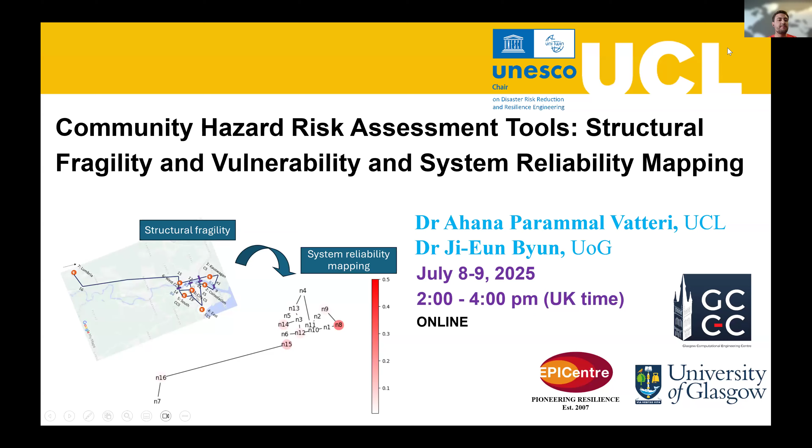So just to introduce our speakers today, Dr. Ahana Parammal Vatteri is also a postdoctoral research fellow at the UNESCO Chair. She works mainly on tools for disaster resilience of integrated systems, in particular with the integration of Bayesian networks and agent-based modeling, and her research has focused mainly on confined masonry and school infrastructure. Dr. Ahana is also working in the Mediate project, the Resilience of Infrastructure Systems on the Horizon Europe project, and she has worked in different consultancy projects across the world.

We also have here Dr. Ji-Eun Byun. She's a lecturer in smart, sustainable, and resilient infrastructure at the Division of Infrastructure and Environment and Glasgow Computational Engineering Center in the University of Glasgow. She works mainly on reliability systems and reliability-based optimization of structural and infrastructure systems against extreme events, in particular natural and human-made hazards, and she is particularly interested in analysis related to complex and large-scale systems, including transportation networks, utilities, resource systems, and structural systems.

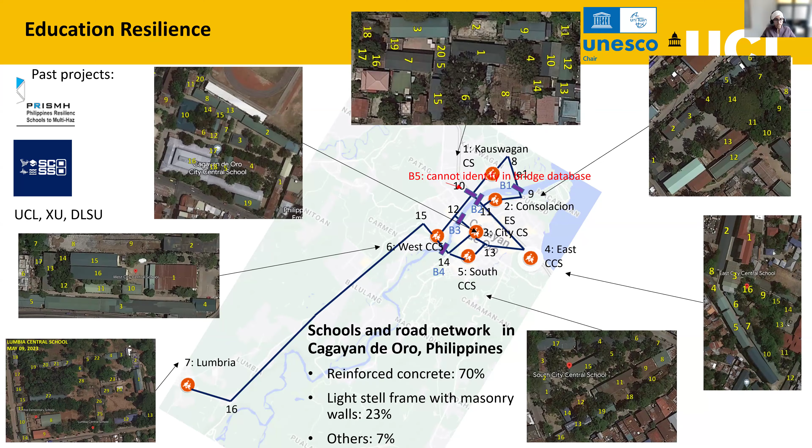So why we are looking specifically at education resilience is mainly because it's a fundamental right for every child to have access to quality education, as we also see in one of the Sustainable Development Goals. It's one of the main objectives of the UNESCO Chair to promote resources for education resilience, risk assessment, and recovery. We thank our colleagues in Xavier University, Philippines, who have been an integral part of all of this work in the Philippines, starting from the data collection on schools and road networks, and also with the recent workshop and event we did in Cagayan de Oro, with support from a PR seed grant.

Now, we come to the topic of today. What we understand as the risk from natural hazards is often comprised of a spatial and temporal overlap of three components: the hazards, exposure, and vulnerability.

For the hazard characterization, we use models that characterize the likelihood of experiencing different hazard intensities at different locations. For the exposure, we understand the location, the quantity, and the physical characteristics of our assets which are exposed to the hazards. And the third component is the likelihood of damage to these assets under different levels of hazard intensities.

So in today's presentation, we are going to look mostly at earthquake hazard, exposure, and vulnerability, even though the techniques in general could be extended to other hazard types. So how do we begin with such an assessment of risk from these three components?

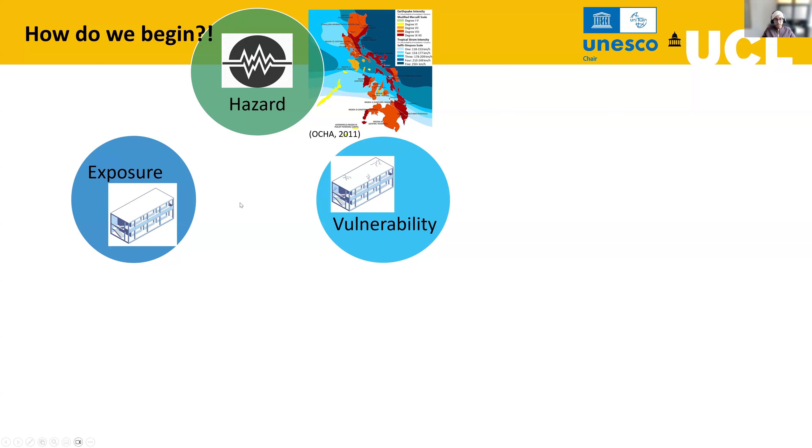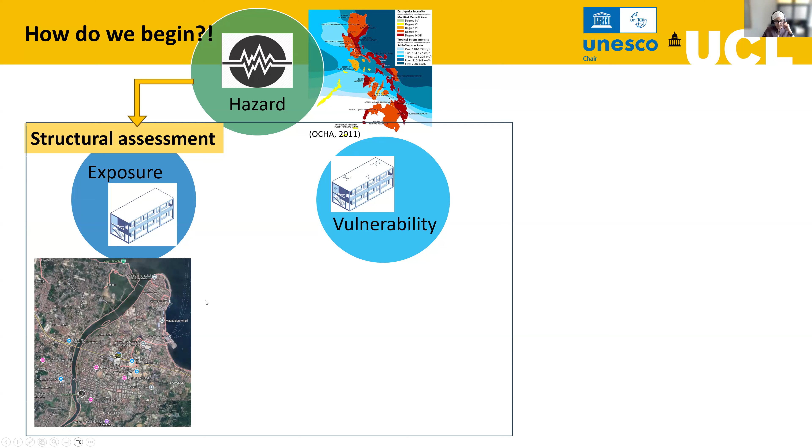Coming to the structural assessment of our exposed infrastructure, we are talking about schools here. Within the city, we will have assets distributed. We first identify a certain number of representative index buildings in order to reduce the load for analysis and also to make the problem quantifiable and handling, so we are able to handle the size.

For this, we will introduce certain tools, following which we can identify some representative buildings, which can then be taken up for detailed seismic analysis, where you would quantify the capacity of your buildings in terms of their base shear and displacement capacities.

From the analysis, we will then move on to quantifying the seismic performance in terms of seismic fragility, which is usually used to express the probability that a level of damage is either reached or exceeded for a given intensity measure. And from fragility, we can then move on to vulnerability, which quantifies the likelihood of losses under a range of hazard intensities.

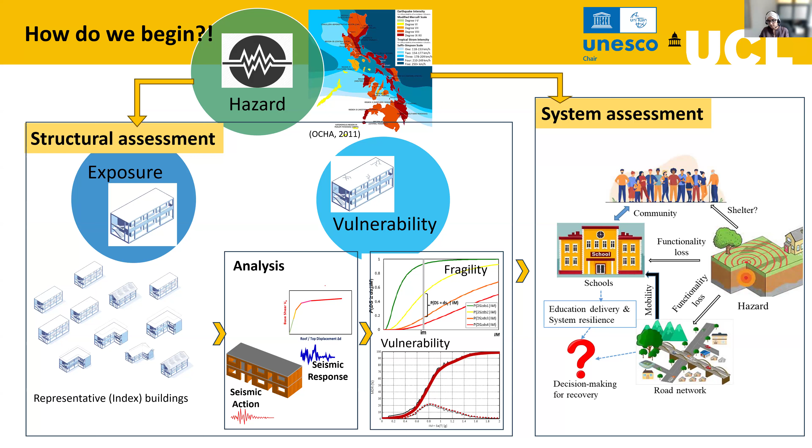These inputs are based on the structural assessment of school buildings in our portfolio, which can then contribute to the system assessment, where we also integrate the interdependency and interaction between different elements, such as the school buildings, the road networks, and the community that uses both these assets. So without further ado, we will focus on the structural assessment in this part of the presentation.

We will introduce first the GLOSI taxonomy, which is a tool for identifying representative index buildings from a large number of building portfolios for schools.

Secondly, to derive the fragility functions from the capacity curves of the buildings, we will use the N2 method and introduce an Excel-based tool for deriving the performance points from the capacity curves, following which we will go to a least square regression tool for deriving the fragility parameters, and then a last tool for converting the fragility functions to the vulnerability functions. We have already sent you an email with resources for performing all of these functions.

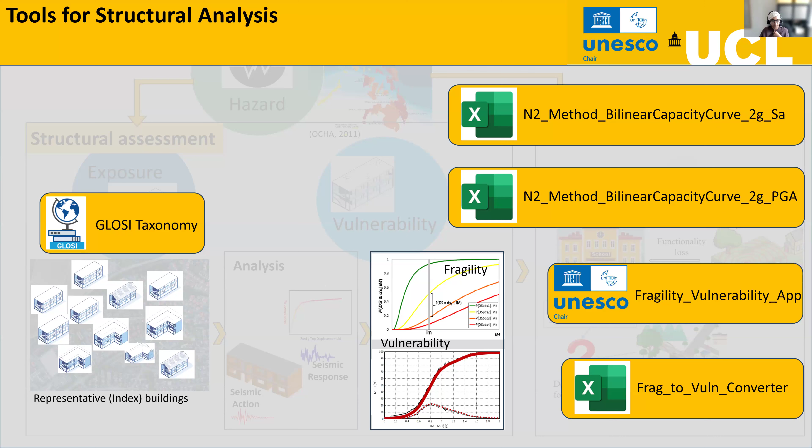So we will first focus on the exposure characterization using the GLOSI approach. GLOSI is part of the Global Program for Safer Schools, an initiative by World Bank with UCL and UniAndes, where school infrastructure has been characterized in several countries, and a global baseline of school infrastructure is produced.

This global baseline basically provides information on the impact of natural hazards and natural disasters on school infrastructure, and also the communities. So it's not just the buildings that are of importance or concern here, it's also the exposure of children in the schools.

The second component of the GPSS program is GLOSI, the Global Library of School Infrastructure, which provides the tools for identifying the characteristic buildings or index buildings, and also to derive the fragility and vulnerability functions.

The idea of this presentation is not to give a complete tutorial on GLOSI. We refer you to a previous course of UNESCO Chair dedicated only to GLOSI application, with several examples and tutorials. You can use this link to go to the website, and also we have all our previous courses recorded on the website for your reference.

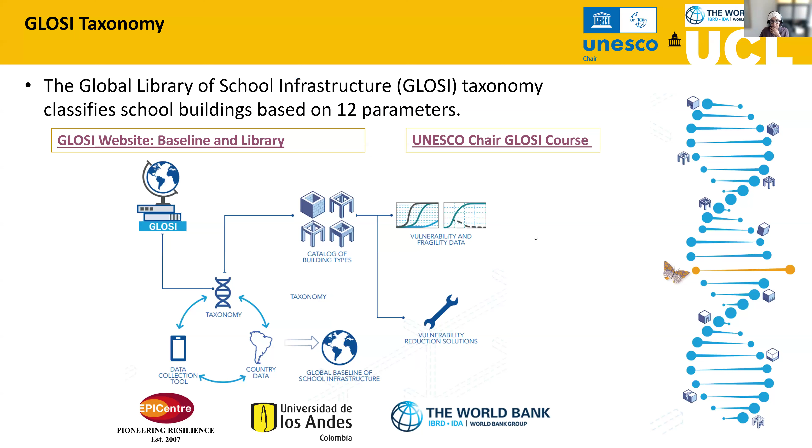Coming to this GLOSI taxonomy, it's a 12 parameter based approach to characterize seismic performance of each and every school building typology. So here we look at these 12 parameters a bit more in detail.

However, we will focus our efforts on the first three parameters, which are the main structural system, height range, and seismic design level. Most of these parameters are observable or gathered through visual surveys in the field, visiting the school buildings and gathering the information.

As I said, the parameters in GLOSI are listed here. The first three are called the primary parameters, which define the main structural type, the building type. Within the main structural system, GLOSI currently focuses on two types of structures: load-bearing masonry and RC, reinforced concrete structures. We will look a bit more into each of the primary structural typologies in the coming slides.

The rest of the parameters, for example the height range, is fairly straightforward. We identify if the building is a low-rise, mid-rise, or high-rise structure, which has a bearing on the period of the structure and its seismic performance.

Similarly, seismic design level varies between typologies. It is characterized as poor, low, medium, or high design categories based on their seismic resistance features. We will look a bit more in detail about this as well.

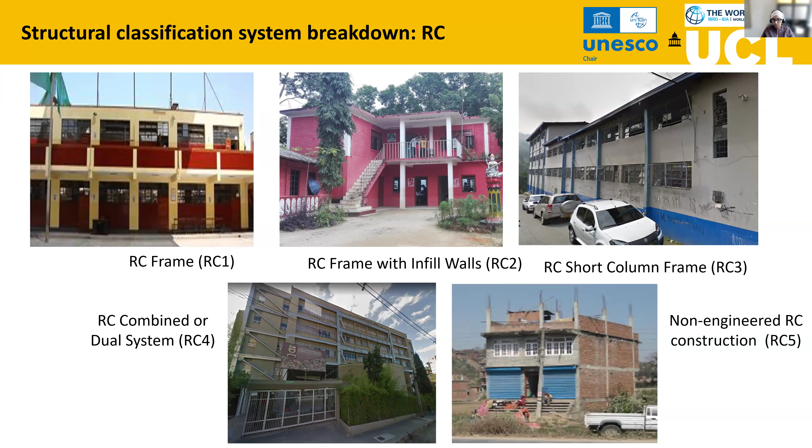Similarly, we have a distribution of typologies within masonry, depending on the type of masonry unit and mortar - different types of unreinforced masonry, and also better seismically performing structures such as confined masonry, reinforced masonry, or steel framed with, again, load-bearing masonry walls.

As I mentioned, the seismic design level, the third parameter, depends on several factors, and it's not a very straightforward distinction between what is poor or low design. We need slightly more information than a visual survey.

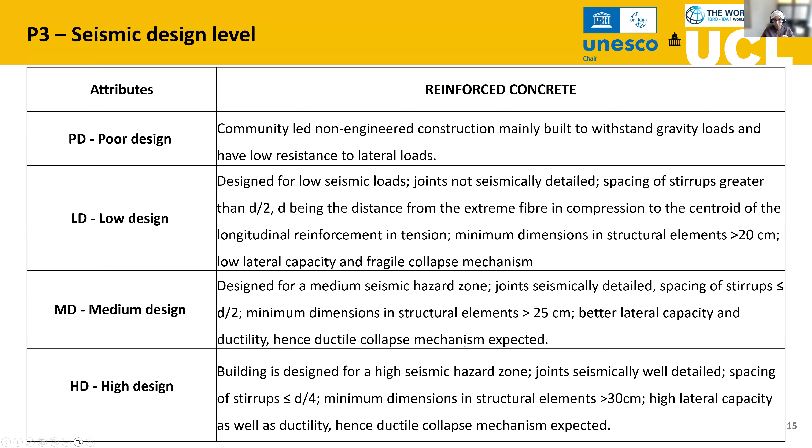This is often collected from the building year, the year the building is built, and the kind of seismic code it conforms to. If none of this is available, we can look at minimum dimensions in structural elements - for example, what can be called a low design as opposed to a high design. Also, if we have information on the stirrup spacing and the kind of ductile and fragile behavior, collapse mechanisms that are expected. This is in the case of reinforced concrete frame structures.

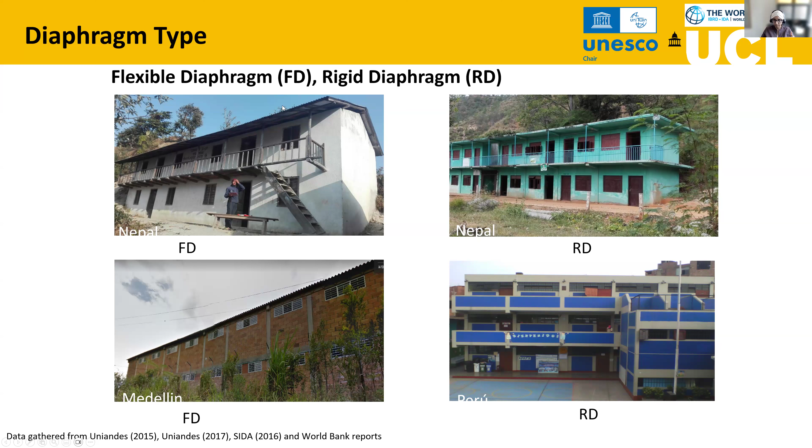The fourth parameter, the diaphragm type, has an influence on the seismic performance of the building. In the case of flexible diaphragms, we do not expect the diaphragm to have much lateral stiffness to equally or proportionately distribute the lateral loads to the walls, as opposed to rigid diaphragms, making flexible diaphragms prone to more local failures.

The span or wall length, the fifth parameter, is defined differently for the masonry and RC cases. In the case of RC, we can call any span more than 6 meters a long span, anything less than 6 a short span. This again has an influence on the way the frame is going to behave under lateral action.

The next parameter, wall opening length, again varies very significantly between masonry and RC. Within masonry, we have a distinction between confined masonry and unreinforced masonry types. For the case of RC, this is characterized as pier type or column type, where you can have a regular column or a weak column - regular or strong column, where we have at least the column depth equal to or greater than the beam depth.

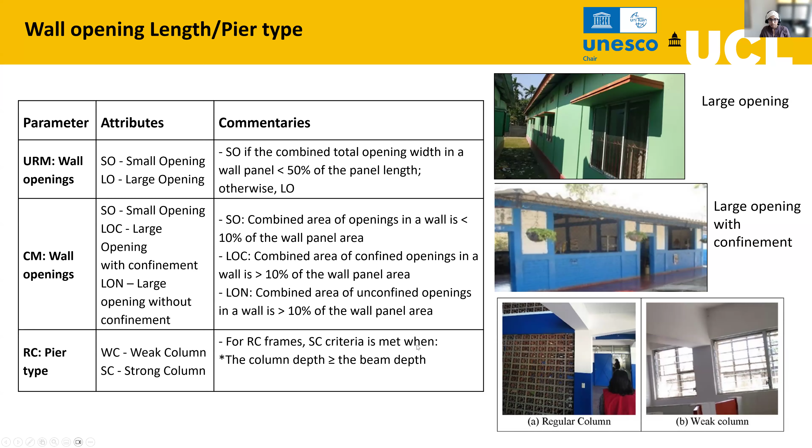The kind of foundation type doesn't just depend only on the foundation itself, it's also influenced by the kind of soil the foundation sits in. So we can have combinations where a foundation can be classified as stiff or flexible.

For example, a strip footing, often seen in masonry buildings, sitting on any soil can be classified as flexible foundation, while concrete footing type foundations can be either flexible or stiff, depending on what kind of soil it sits in.

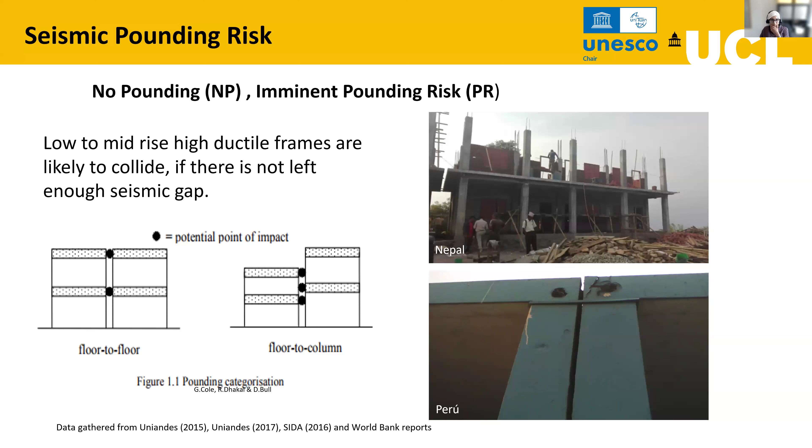The next parameter is seismic pounding risk. It's not an issue with the structure itself, but because of its proximity to an adjacent structure, which becomes a problem under seismic action.

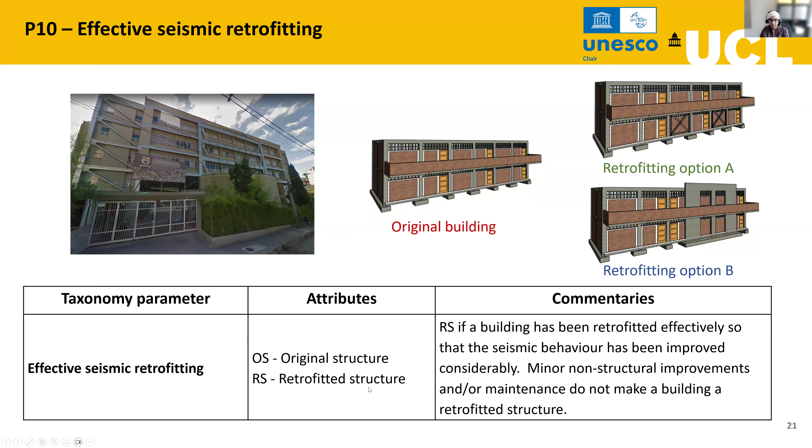The 10th parameter is seismic retrofitting. So we identify if it's an original structure or a retrofitted structure with significant improvement in seismic performance.

The next one is poor, fair, or good condition, generally observable from visual surveys. In the case of RC structures, for example, there is spalling, corrosion, or reinforcement being visible, or in the case of concrete itself, there could be honeycombing or poor aggregate grading and so on.

The last parameter is vulnerable non-structural components. These are not structural elements, but their failure can cause damage or death, or it can cost money. This includes things like parapets, ceilings, infills, tiles, and so on.

So how these are significant is: when we identify the typologies for the main first 3 parameters, we identify the building types, and for the remaining 9 parameters, we identify specific categories within the first 3.

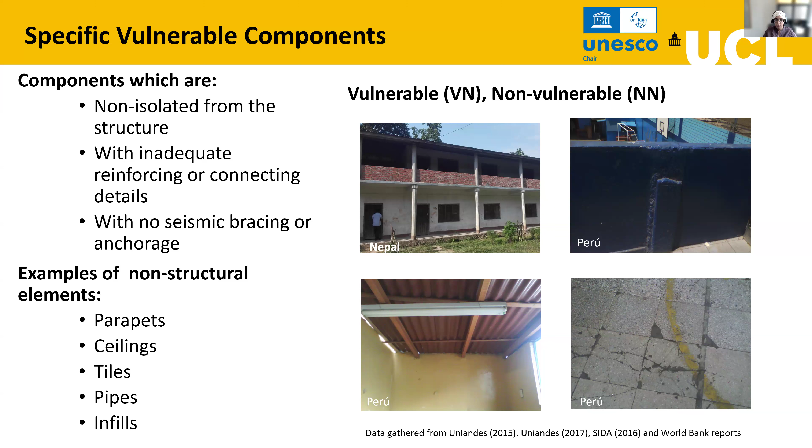There is more information and guidance available on the website shown earlier on how to apply the taxonomy, and also a complete guide into all of these parameters for both RC and masonry. We invite you to check these resources if you're interested in applying the taxonomy in your research or work, and also check the UNESCO Chair's course on GLOSI for more details.

We know that its stirrup spacing is within D/4, and we know that the minimum dimensions are more than 30 centimeters. Hence we expect a ductile collapse mechanism and assign a high design level.

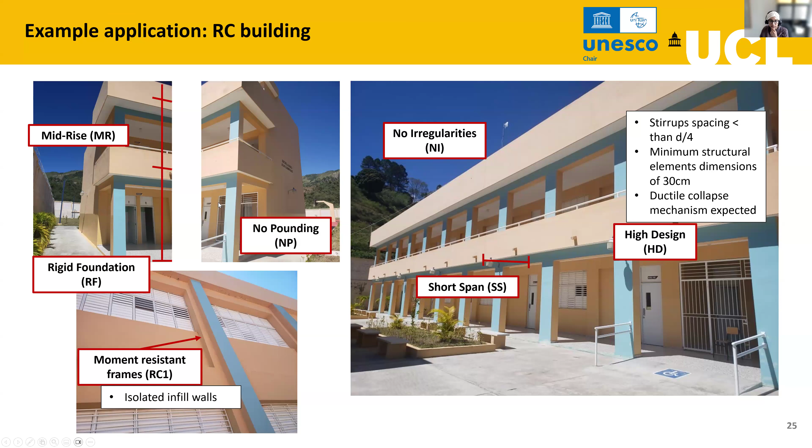It's an original structure without retrofitting. Visually, it looks like a well-maintained, good condition building.

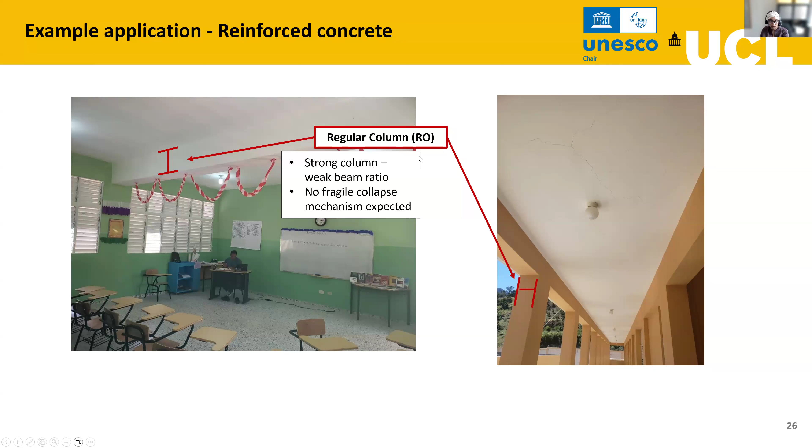Oftentimes we take a look inside the building to see the features of regular columns or the type of diaphragms, the rigid diaphragm in this case, and also for non-structural vulnerable elements present in the classroom.

Combining all of these alphanumeric values or codes, we generate the taxonomy string. So for this building, we get RC1 MRHD, a string that really is the DNA of this building.

Once we gather this string, we can then produce the string for every building in our population or portfolio to identify the most representative buildings for analysis.

This is an example with confined masonry. Similarly, you can identify the main structural system: masonry buildings confined with RC elements.

It's a low-rise building. We understand it's a poor design because it has the minimum required confinement present, but not additional confinement.

Similarly, we have a flexible diaphragm, no irregularities, long panels. In the case of masonry, the panel length is different from RC, which qualifies it as a long panel. Similarly, flexible foundations and large openings without confinement.

From outside, you can say that the building has no pounding risk, no evidence of retrofitting, and good conditions. But it has a ceiling, which is a known non-structural vulnerable component.

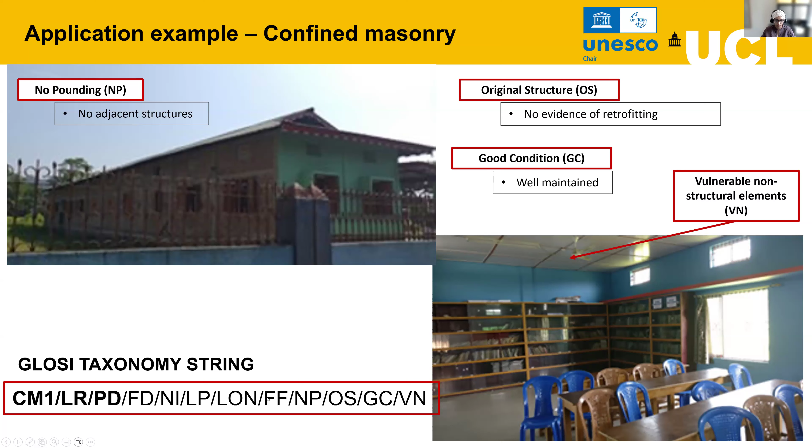So for this building, we generate a string in this form. Some examples from our Cagayan de Oro database: this is an RC HR high-rise building, identified to have a medium design level.

This is another building with 2 stories, a mid-rise RC2 building. If we continue this exercise for the entire population of buildings we have, we can produce this kind of distribution, identifying the most recurring typologies and most vulnerable typologies, which can then directly and immediately inform our decisions to intervene.

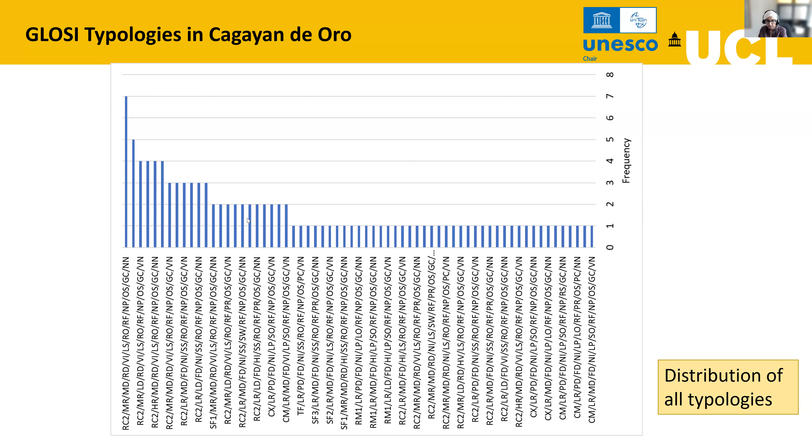Without considering the 9 secondary parameters, we can stick to the first 3 to identify the main structural or building types, and then assign fragility functions which are available from the World Bank database if you can find similar or comparable typologies to this typology.

Please watch out for the website that I shared before, the GLOSI website, for updates on the fragility functions that are available. The website is being updated and migrated to a different platform, so currently the fragility functions are not available, but you will be able to see them once the migration is complete.

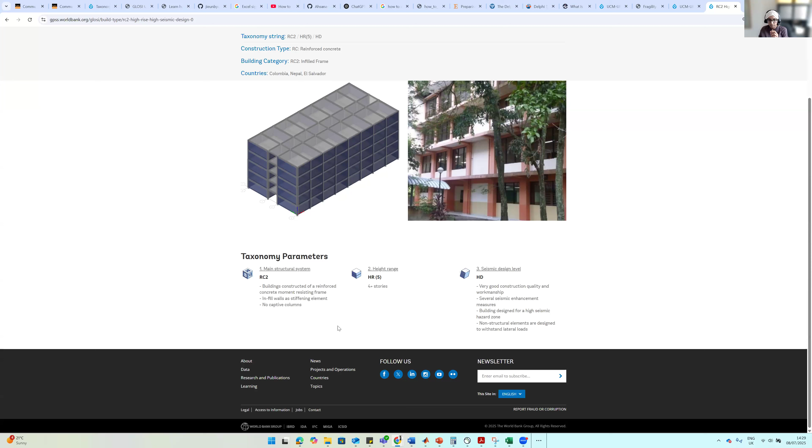This is where you will find the typologies, find the index buildings. If you go to each one of them, you will be able to find more information on them and the fragility function that is corresponding to this typology.

So if we move on to the next section.

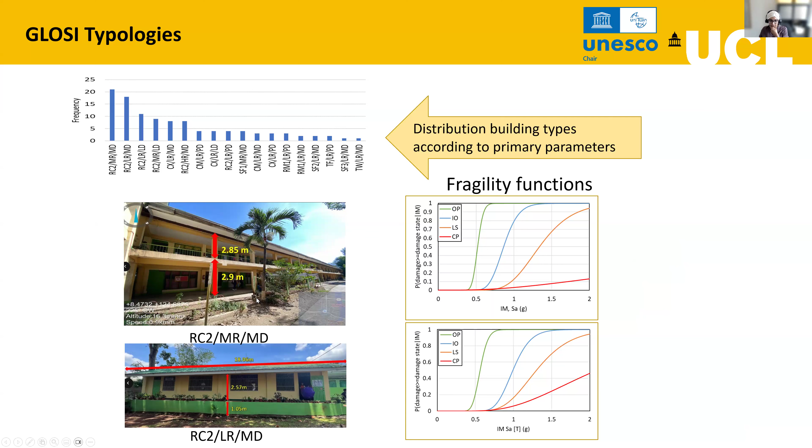Suppose we don't have a typology that is representative of our buildings on the website, or any database of fragility functions that you have access to, we might then end up having to derive these fragility functions for our buildings.

We can have different approaches of deriving fragility functions, for example, analytical seismic assessment methods, or empirical fragility derivations based on existing data of damage after earthquakes. Here we are going to look at the analytical approach to fragility and vulnerability.

The attempt here is not to entirely give a presentation on deriving fragility functions in this talk. We refer you to a previous course on the UNESCO chair again in this regard, for which the recordings are also available for your reference.

Fragility functions, as we mentioned earlier, express the probability that a level of damage will occur as a function of the value of hazard intensity.

Again, from the fragility functions, we can then go on to the vulnerability, where the likelihood of losses from each damage state at a given intensity level is accumulated, to assess what is the total loss at a given intensity level.

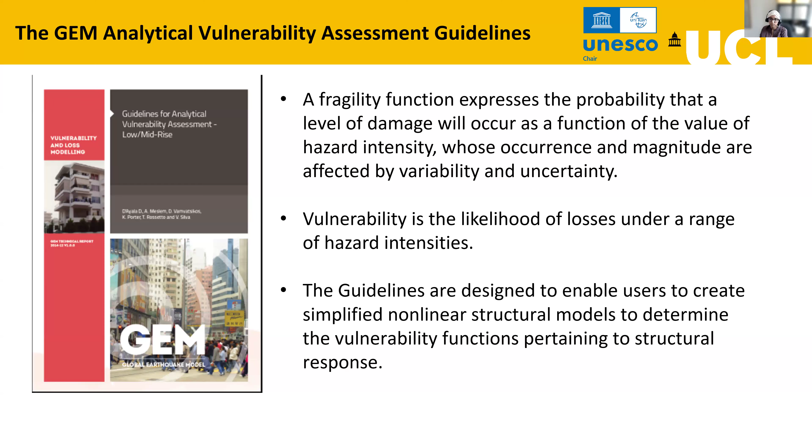There are guidelines such as the global earthquake model, which guide you through step-by-step procedures to derive analytical fragility and vulnerability functions. It adopts a step-by-step process such as shown here.

The first step of identifying index buildings, we have already gone through this with the GLOSI approach, and you end up with these kind of representative index buildings for the population of buildings we have.

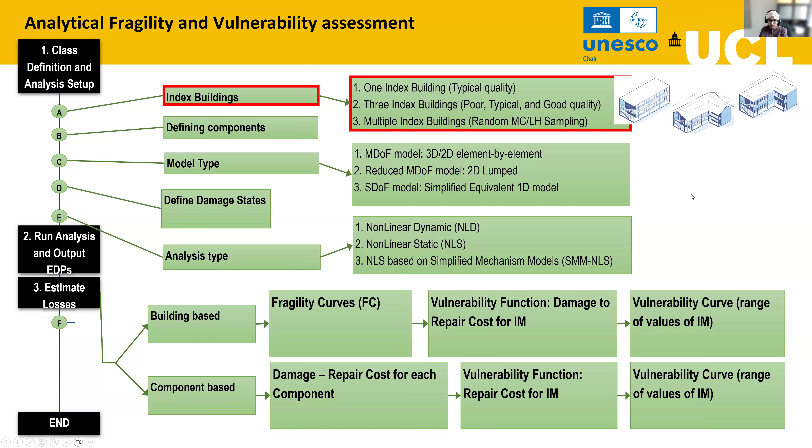Secondly, we can define the type of models we want to create. There are options. Again, the GEM guidelines give choices of different model types depending on the complexity and the level of computational effort and the expertise of the person using these.

So we can go from very detailed multi-degree of freedom system models to single degree of freedom simplified equivalent 1D models. The more detailed your models are, the better, or the closer to realistic real behavior that you are able to generate.

Once you have decided on what kind of models we want to generate, we can then perform an analysis and observe the seismic performance or the behavior of the building.

Again, we are not going to deal with the details of modeling and analysis in this course. With the UNESCO chair, we have a previous course on using OpenSees platform for modeling and analysis for you to refer if interested.

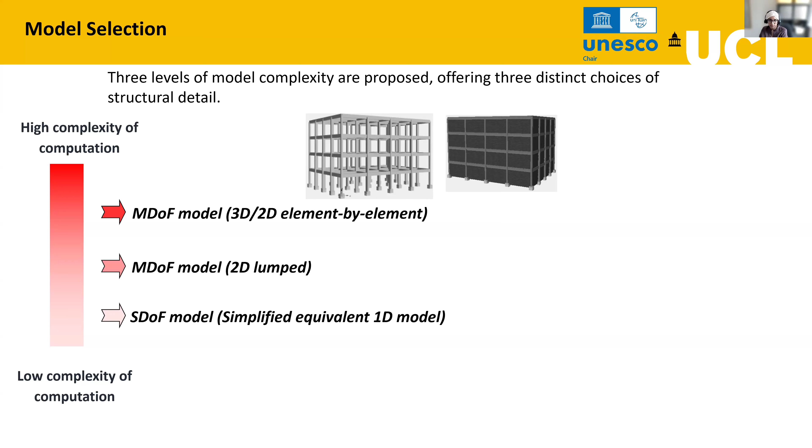The next step, after we identify the model types, we need to define the damage states. So what is the level of performance you would expect or want the building to have is defined through the damage states. Say, for example, the FEMA guidelines give you 4 performance levels where the building will stay functional.

Or the building is expected to be reasonably usable and operational immediately after the event. Or the life safety limit says the building is damageable - it suffers damage, but there is no threat to life safety.

And the last one, the collapse prevention level, it suggests that the building is expected to be stable under gravity loads while suffering extensive structural damage.

So this is often defined in terms of an engineering demand parameter. Oftentimes we use the roof displacement or interstory drift values to characterize the engineering demand parameter, and the limits are defined as drift values on the capacity curve.

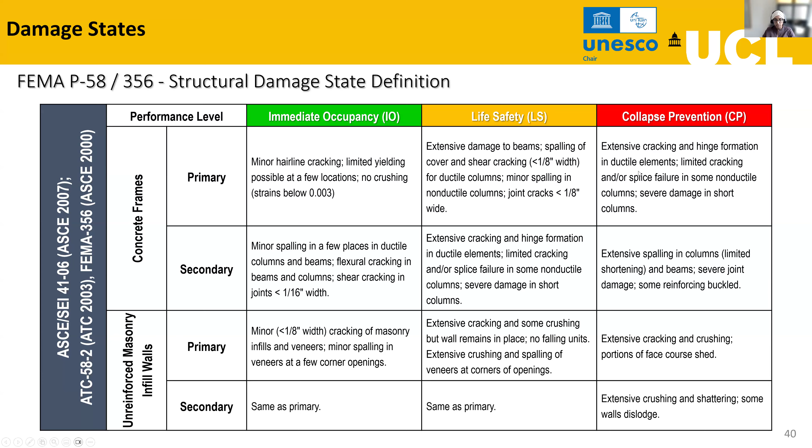The FEMA guidelines give a detailed explanation on how we can identify that a building has reached immediate occupancy or each of the damage states or performance levels, through minor cracking on primary elements to extensive damage to beams. For example, for life safety and collapse prevention, you see extensive cracking and hinge formation in RC frames. So with the damage states defined, we can then go on to do the analysis type.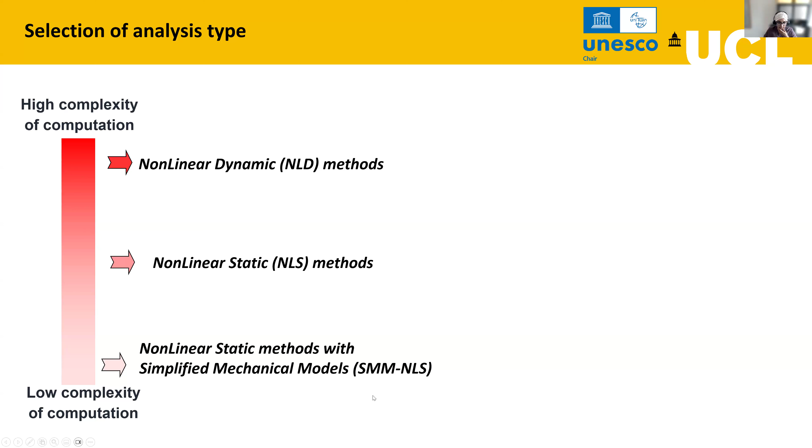Similar to choosing the model types, we can go for very detailed nonlinear dynamic methods, or go for very simplified mechanical models that are less computationally expensive. This depends on the complexity of computation, the available resources, and expertise.

In this method, for example, the pushover curve is a nonlinear static method where we would create a structural model and subject it to a gradually incremental lateral load to produce a base shear versus rooftop displacement function. This characterizes the nonlinear capacity of our model.

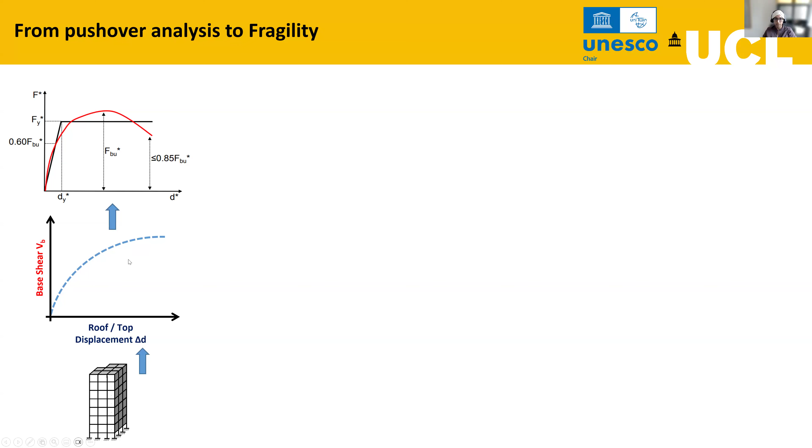So once we have the capacity defined or characterized through the pushover curve, how do we go to fragility functions? In this method, we would first idealize that pushover curve into a bilinear curve. If you have a multi-degree of freedom model, an MDOF model, we would first reduce it to an SDOF model and then convert that to a spectral space.

So we bring our capacity to the ADRS, the acceleration displacement spectrum space, which can then have a direct comparison between your seismic demand in the same space. The blue curve here is the recorded ground motion, which is reduced or modified to the inelastic spectrum, which is also dependent on the properties of our structure. This gives us a performance point where our building capacity meets the seismic demand in the inelastic space.

So this particular point is obtained as a performance point, which can be repeated for a number of ground motions to generate a cloud of performance points. This method is called the N2 method, which is widely used by practitioners and in engineering codes. We have implemented this N2 method on an Excel-based platform.

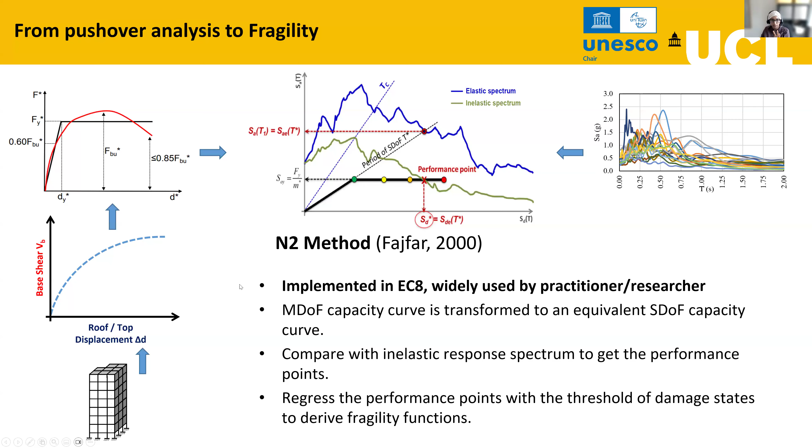We will first see what inputs we require for running the N2 method. You have already performed your model analysis to produce a pushover curve where you have characterized the base shear versus roof displacement relationship. So you are given this input file, which is the MDOF capacity curve. Other information you would need is the number of stories, the story height, the mass, and the mode shapes of the structure. The remaining parameters, for fragility derivation and vulnerability derivation, we will discuss as we talk about these.

Once you have this input file, you can then go to the N2 method bilinear capacity curve tool. The first one here is based on an intensity measure of spectral acceleration, while the second one is the PGA, the peak ground acceleration, which is often useful for masonry or confined masonry buildings.

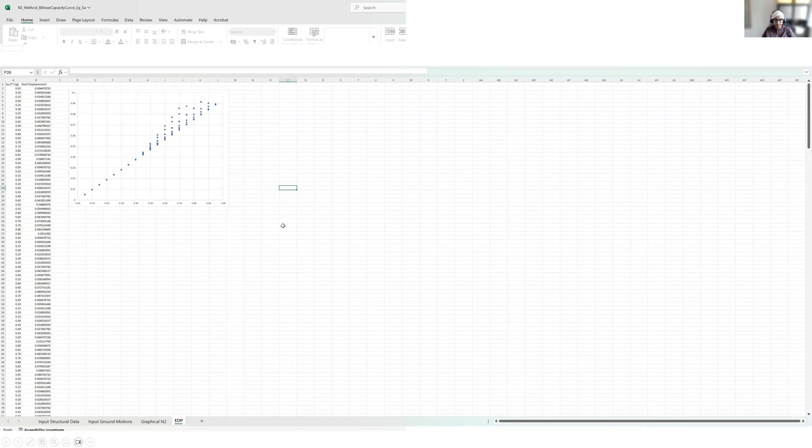So if you go to the N2 method toolbox, you have four tabs, where the first one is the input structural data, where you will paste the capacity curve that we just saw in the input file, along with the other information - that is the story height, the number of stories, mass of floor 1 and 2, and the mode shapes.

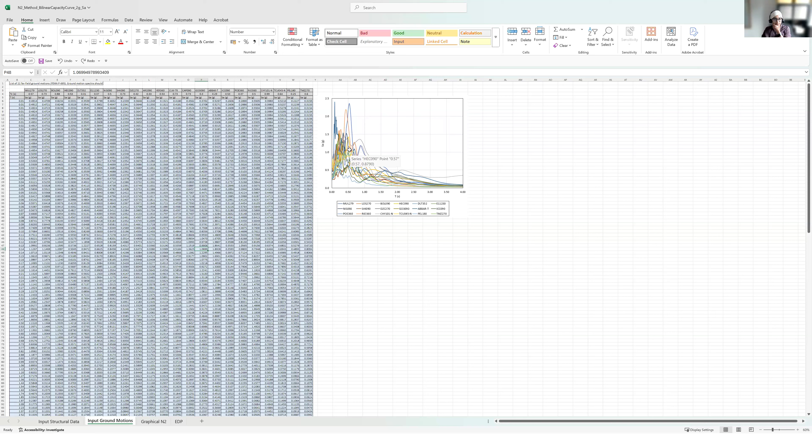The second tab here is the host of input ground motions, a FEMA set of 22 ground motions, which is then scaled by a number of factors - over 20 scale factors are used. Each ground motion is scaled by the scale factor, and we perform that comparison between the capacity and the inelastic ground motion spectrum.

Once you click the EDP generator, you will see that the program runs your input files and assesses the performance points. So when you are installing or saving the N2 method tool in your system, make sure that you enable macros so that the program is able to generate the engineering demand parameters.

The last tab here will give you the results of the analysis, which is basically the intensity measure versus the roof displacement - each of the points generated as a result of comparing the ground motion record and the capacity curve. So we have produced the IM versus EDP function here as a cloud of performance points.

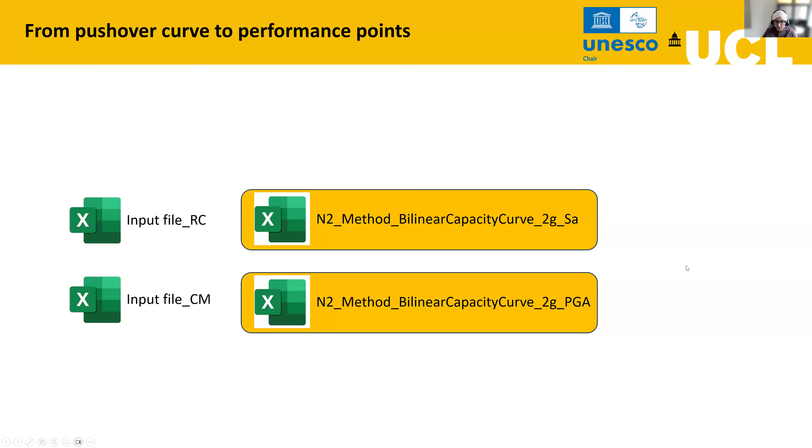As I mentioned before, we have this cloud of performance points obtained from the N2 method. Now, how do we get from a cloud of performance points to the fragility function? This is a regression problem. You can use any of the available regression approaches, such as the method of moments, where you simply calculate the mean and standard deviation of your distribution, or better methods like maximum likelihood, generalized linear models, or the least squares method.

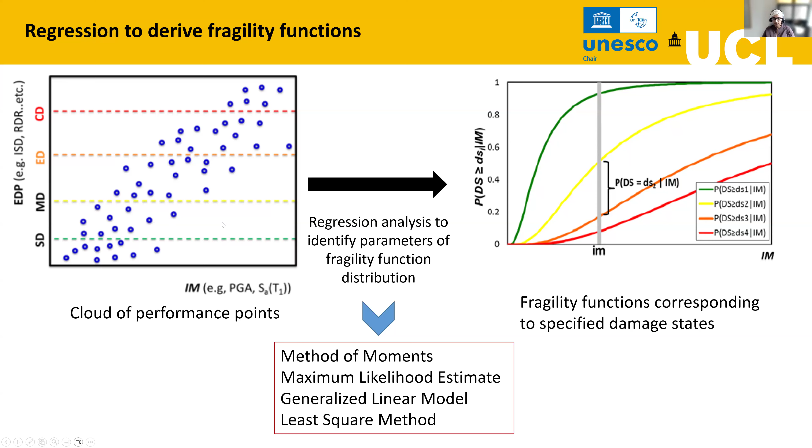For illustration, let's look at the least squares method in more detail. What we're trying to do is a piecewise regression instead of a regression over the entire cloud of points. We identify the EDP threshold, the damage threshold, for each of the damage states, which are defined as slightly damaged, moderately damaged, extensively damaged, or collapse. For each damage threshold we define an EDP value. The EDP, or engineering demand parameter, could be the rooftop displacement—so your SD could be a rooftop displacement value that characterizes slight damage.

We identify the IM points such that we have at least half of the performance points below and above the threshold value. For example, for the SD damage threshold, we use the points below the yellow line and regress to obtain the parameters of the green line. This can be characterized as a line with slope A and intercept ln B. The parameters A and B are obtained from the regression, which can then be mapped back to the log normal function that characterizes the fragility function.

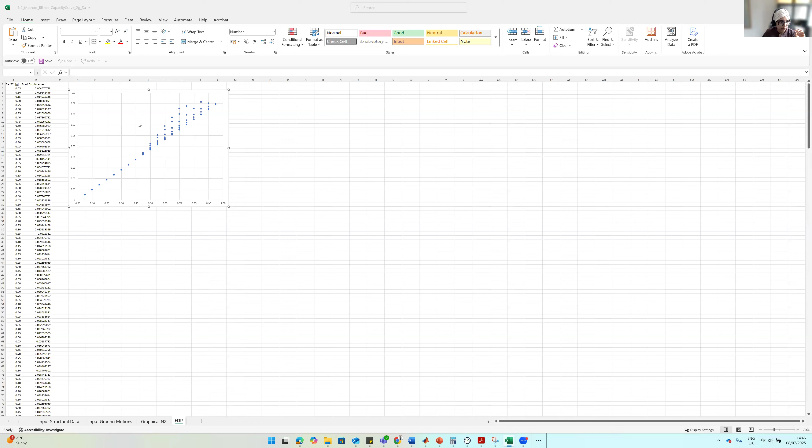If we go into the LSM fragility app, you'll have a presentation that guides you on how to install this program on your system. Once you install it, you can use the input file here, the LSM input Excel file, which is the input for your fragility derivation. We've already identified the IM-EDP performance points from the N2 method. We'd take this result and paste it into the input file for the fragility derivation.

We provide the IM-EDP values as the input here. You also need to provide the threshold values of the different damage limits that you've defined—the slight, moderate, extensive, and collapse damage states, and at what EDP thresholds they occur.

So the EDP here is the roof displacement, and the threshold values are inserted in meters, as 0.02 meters to 0.09 meters, which is also provided in your input file.

So if you go back to the first input file that we used for deriving the N2 method, you go to the second sheet here, you are also given these inputs here for fragility derivation. So we can insert your values here, the threshold values, and the vulnerability derivation is also available here. However, we have a separate tool just for the derivation of vulnerability functions. So you can either use this or the separate vulnerability function.

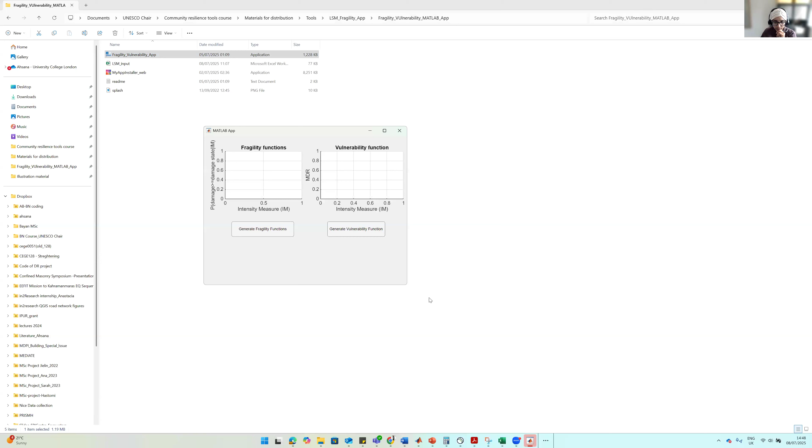So here we have the... is this okay? Can you see?

So if you run the generate fragility function, it runs a MATLAB code in the background to generate the fragility functions. It might take a bit of time. And again, this app is currently under further modification, so we will update an updated version on the UNESCO Chair website whenever it's available. So please keep an eye for this.

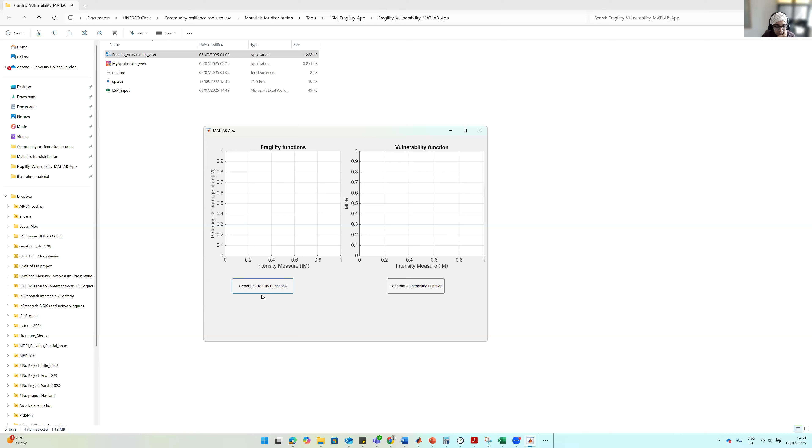So your fragility functions are now derived, it's ready, and you can generate the vulnerability functions along with that. Once you have completed the run of the program, you can go back to your LSM Excel file to extract your results. So the results are also available in the LSM Excel sheet, and you can take out the fragility parameters, which is the mean and standard deviation of your fragility functions corresponding to each damage state, can be extracted from here.

So this is where we are - so we have now come to the point where we have generated the fragility functions using the MATLAB-based code and using the inputs of performance points, as we discussed.

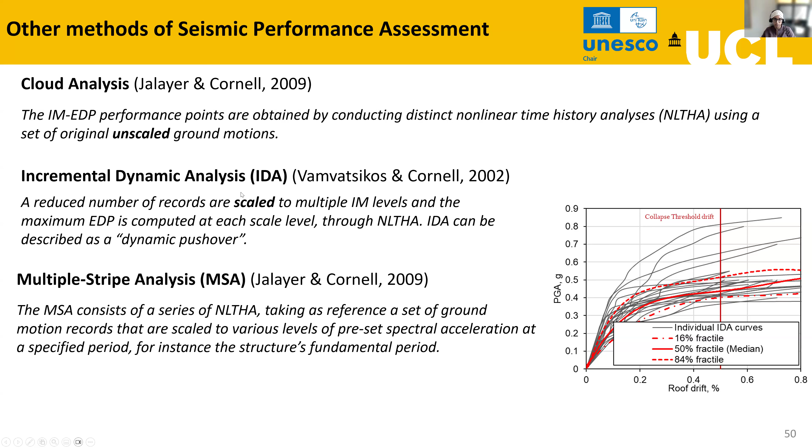I want to point out that this is just one of the several methods that are available to derive fragility functions. You can also go for more sophisticated methods with direct nonlinear time history analysis in different forms, such as direct distinct nonlinear time history analysis, or you can use multiple stripe analysis, and so on.

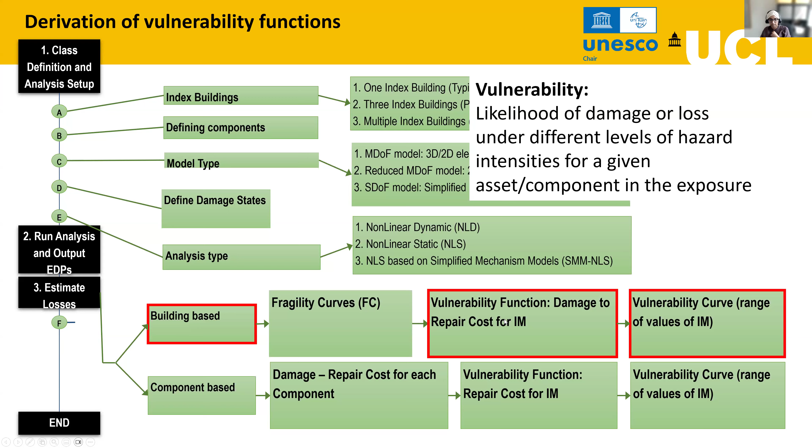So once we have the fragility functions, we can go from fragility to vulnerability functions. So this is where we characterize different - we also bring in the economic aspects of damage to the problem. So we assign what is the cost of damage at each damage state.

So say, for example, for a given IM, the building has certain probability of being in damage state 1. In each of the damage states, we have a certain probability of exceeding at that IM. So if you take out your cost associated with each level of the damage and find the cumulative cost at that IM level, you can generate the vulnerability function.

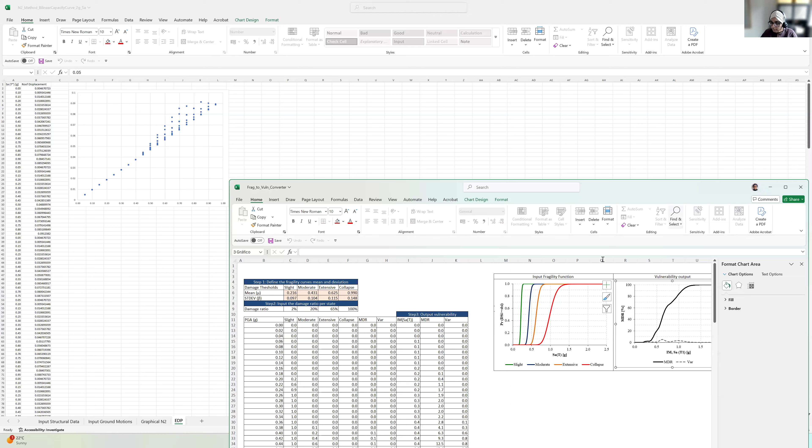So for this, we can use a last tool in our folder. If you come to these tools, you have the fragility to vulnerability converter, in which now the input is the fragility function that we have derived.

So from the previous analysis, we know the mean and standard deviation of the fragility functions, which is the input for this file. Once you have inserted your mean and standard deviation, it calculates the fragility functions and also the mean damage ratio and variance, which is basically plotted as the vulnerability function here. So it gives you the mean damage ratio at all IM levels, along with the variance of the vulnerability function.

So here, another input is the damage ratio, which is different for different damage levels. So for example, for the collapse damage state, you're assuming that the entire building needs to be replaced or repaired, as compared to when it is a slight damage state, where it's only 2%.

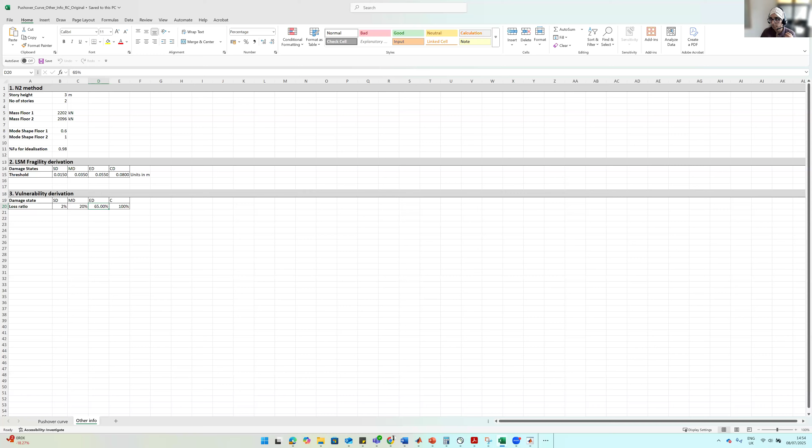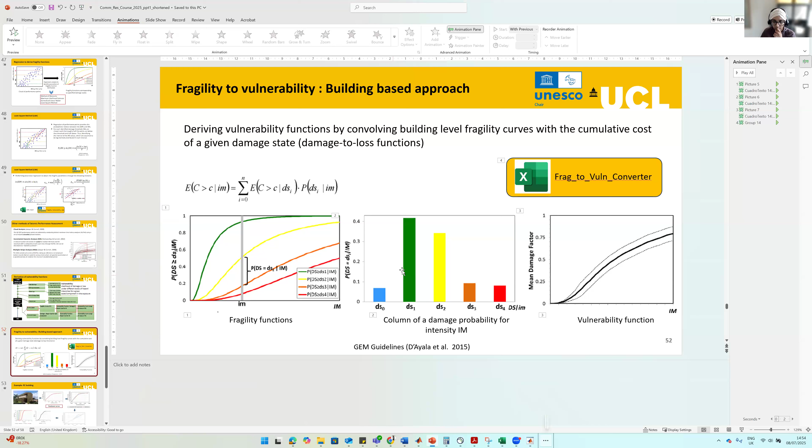So we introduce these damage ratios as well in your input file as the third set of input information. This can be different for different assumptions, different types of structures, where each of the damage states corresponds to different levels of damage. So with that, I think we have discussed all our tools for deriving fragility and vulnerability functions.

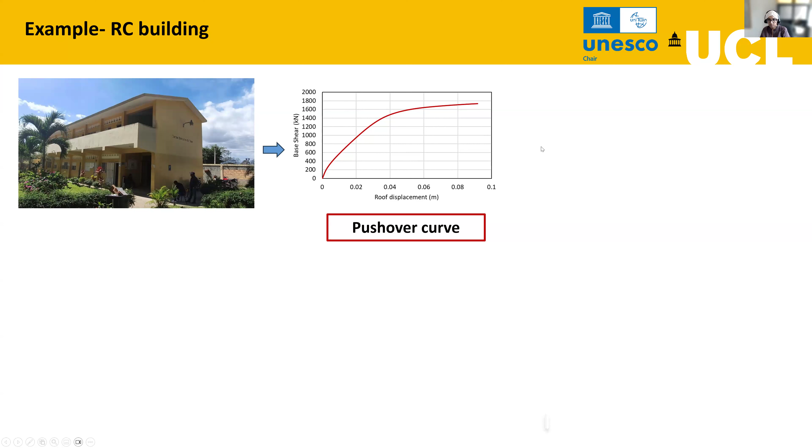We apply this to an example case. You're given an RC building, a 2-story building with some short columns, as shown in the figure. The first input is the pushover curve, with base shear versus displacement, idealized into an SDF curve. We then carried out pushover-to-EDP analysis using the N2 method, and then moved to fragility and vulnerability derivation. This is the whole process of going from an index building to its fragility and vulnerability.

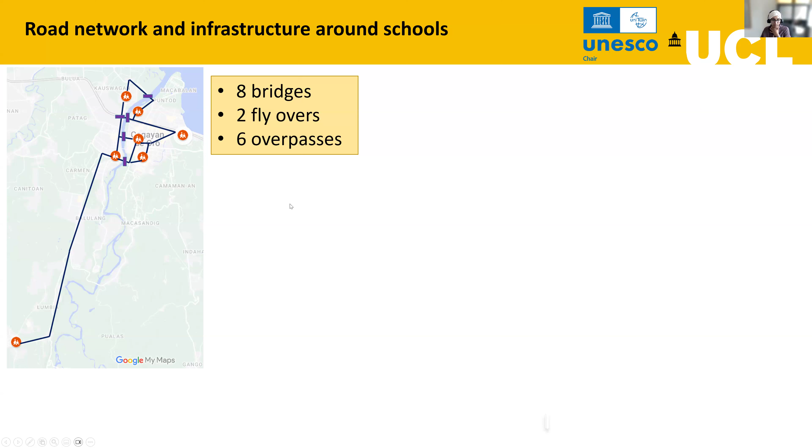So far we have discussed the school building infrastructure and inventory. Another important component of system level assessment is the road network, especially bridges, flyovers, and overpasses, which can be damaged in an earthquake event, making connections between schools impossible, so education delivery cannot be achieved. To understand how this affects system reliability, we also characterize the fragility of the transportation infrastructure in a similar manner as we did for buildings.

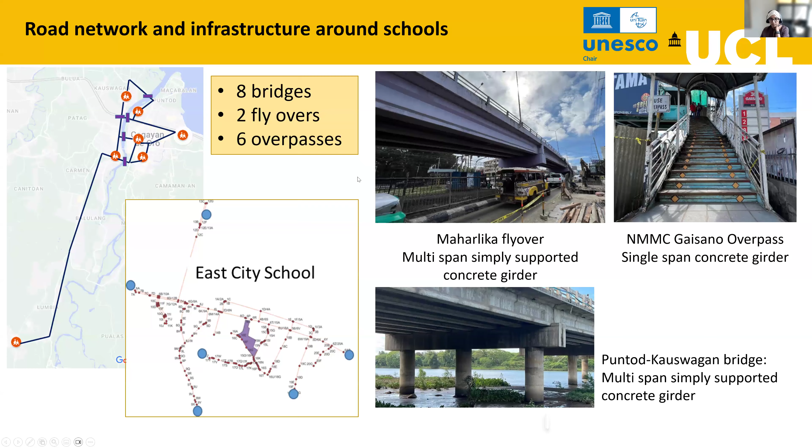For each bridge structure, we identify the typology as before, using available information on bridge typologies, and utilize available fragility functions from literature for each type. There are techniques for deriving fragility functions in a similar manner for bridge typologies, often combining different components of a bridge. There are different methods for deriving these fragility functions which we won't cover in this presentation; instead we use fragility functions already available for these bridge types.

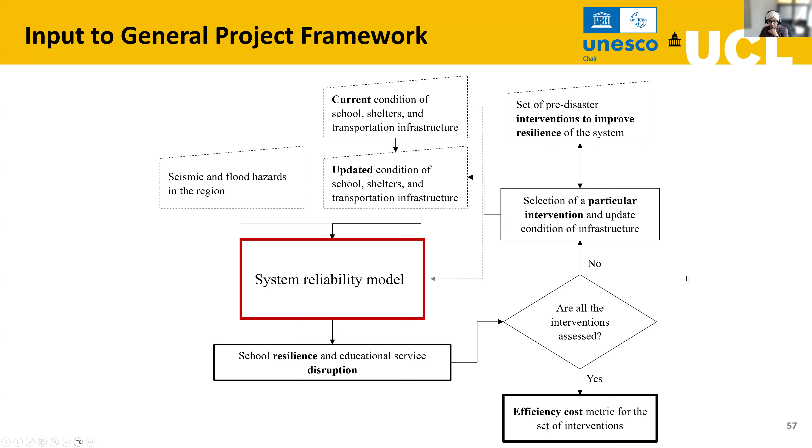With that, the structural assessment is complete. We have generated the fragility functions, which will move to the system reliability model as input functions. In the next presentation we will look at system reliability approaches, but I think we have at least 3 minutes, so if anybody has quick questions we can take them now, and we can have a more detailed Q&A for any of these sections tomorrow when we come back with the hands-on task.

I don't know if we have any questions in the Q&A. I think the last question is relevant. There are a couple of questions.

Yes, Sana. One is how we can determine the EDP associated with each damage state. The other one is, based on your experience, could you share your insight on any available comparison between the EMS damage state medians and the IM corresponding to code-based performance levels or NTC18-based ones? So how do you go from the EMS98 damage state to the analytical drift, basically, when we have the fragility curves and want to move to code-based evaluations?

I think maybe these are best answered in writing. Maybe you can answer them here. You can type the answer, and it will take just a couple of minutes, I can talk.

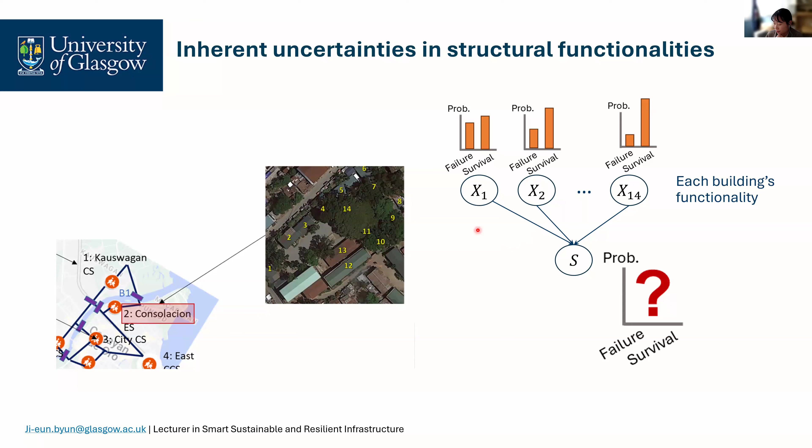If we zoom into one of these school systems, we discover that it is actually a system of multiple components; in this case, this school complex is a system of multiple buildings. The challenge is always how we can correctly decide the uncertainty, or probability distribution, associated with the system event, which is determined by the uncertainties in the component probabilities. For instance, there are 14 buildings each with their own probabilities for each damage state, and how they combine within the system function to decide the uncertainty in the system event. This is what we're going to discuss for the rest of today, using system risk assessment tools.

So this was the brief background of the system we are considering. First, I will introduce the formalized definition of system risk method or system reliability problems. There are two commonly adopted methods: sampling and decomposition. We will go over a brief overview of these two methods.

But in this tutorial, we're going to especially focus on this decomposition method. I will introduce how we can use the MBNpy Python package to implement this decomposition for system risk assessment. And tomorrow, we are going to run a hands-on tutorial by looking at the codes together to assess the risk of school complexes in the case study area, Cagayan de Oro, the Philippines, that Asuna just showed with the community that we work together.

At the end of the tutorial, the intended learning outcome is first, you will be able to understand the concept of system risk assessment, and you will be able to analyze your own system risk problems using the MBNpy module.

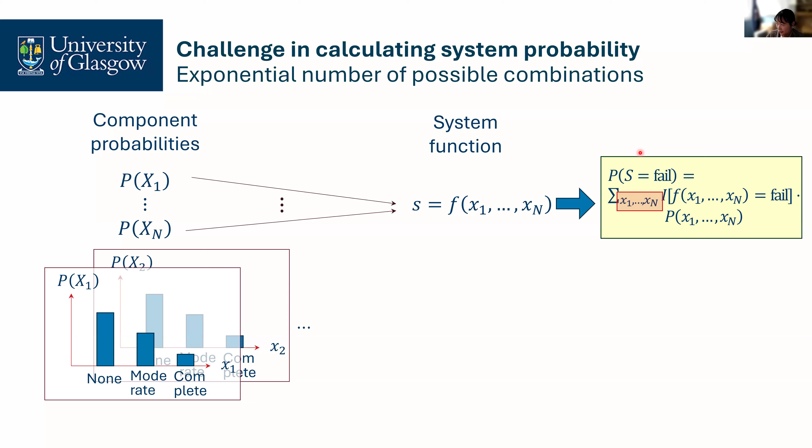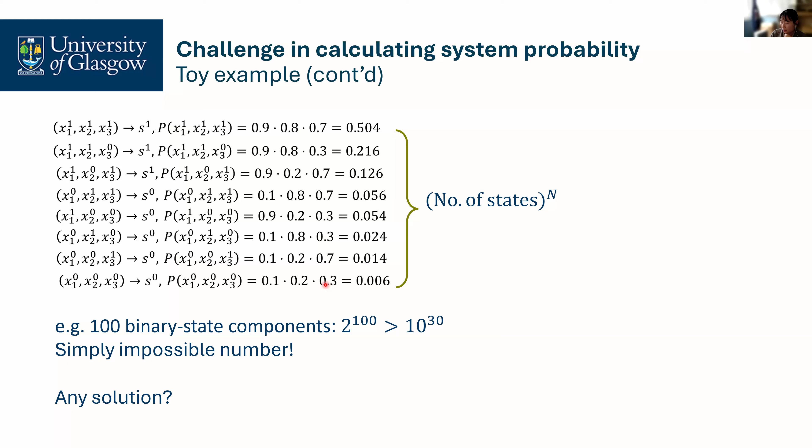Of course, the challenge is now we have these possible combinations in an exponential order of the number of components. This is problematic because if we have 100 binary state components, which are not too many considering real-world systems, we already end up with an impossible number. So solutions have been developed not to enumerate all these instances, but to bypass them while getting accurate enough results. That will be what we'll be discussing as solutions in this tutorial.

So I will first start from the sampling, which is the most common solutions. I will introduce Monte Carlo simulation, which is the most vanilla method. But the characteristics of this sampling method are present in other advanced sampling techniques as well.

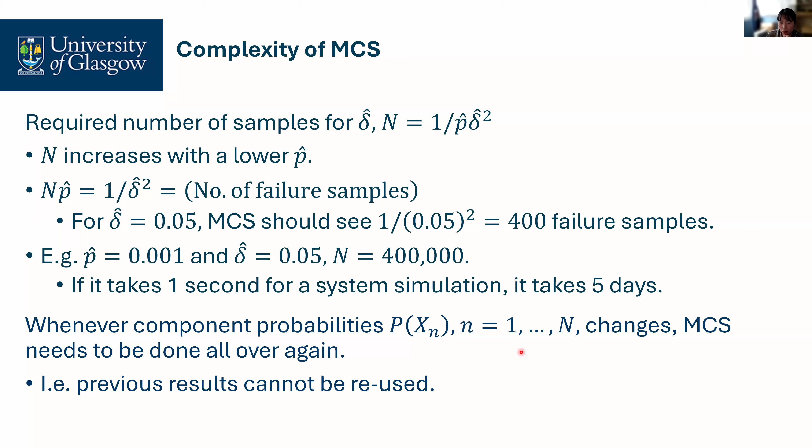Another constraint is whenever component probabilities change, the MCS needs to be done all over again. This is because MCS cannot reuse the previous result, and this has also been the challenge for practical implementation because component probabilities usually constantly change when we do analysis over a community.

Then there's an alternative, which is the decomposition method. The decomposition method achieves its computation efficiency by using the understandings of a system event. In our case, the solution that we are going to look at utilizes this coherency. It applies to only coherent systems where better component states do not worsen the system state, which is very common in many system simulation functions, including many of these network analysis functions.

So the basic idea is that in the decomposition method, if we have a sample that we know is a system failure, then we instantly conclude that the domain worse than this sample also belongs to system failure. And if we identify a sample that belongs to system survival, we can instantly identify that the domain better than this state already leads to system survival. We continue this process until we identify enough system domains.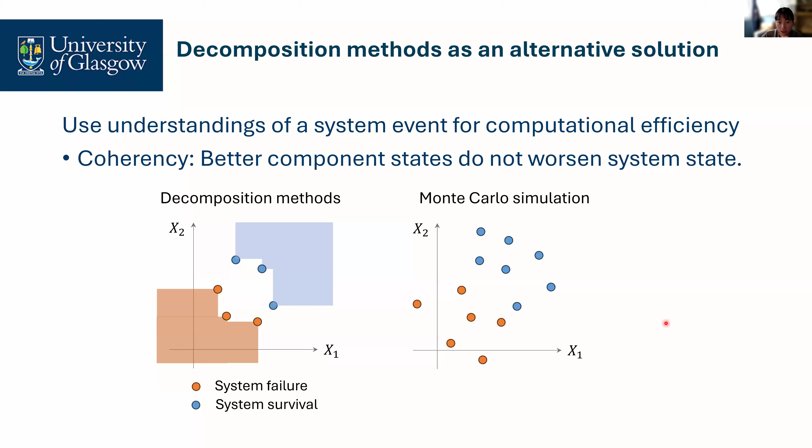In case of Monte Carlo simulation or other sampling methods, even if we know about these samples, we still need to sample the other parts that can be inferred from the state of these samples. This is how the decomposition method achieves its efficiency.

So let's take a look at how this works. Consider this problem where xn, these edges, 5 edges, take the state of either 0 or 1. System failure is defined as disconnectivity between N1 and N4. We start from this total event space and this variable, and we branch this total event by failing and surviving.

If we look at this branch, then now we look at x2. We find that if x1 and x2 fail together, the system fails with this minimal failure condition, where if x1 and x2 fail together, the system fails regardless of the state of the other components.

If we go on branching this branch, then now we have x5, and if x2 and x5 survive together, the two nodes are already connected regardless of the other component states, so the system survives.

For this branch, if we look at x3, then if x1, x3, and x5 fail together, this branch belongs to the system failure domain. If we look at x4, then depending on the state, we conclude it is either failure or survival. We can continue this process for other branches as well.

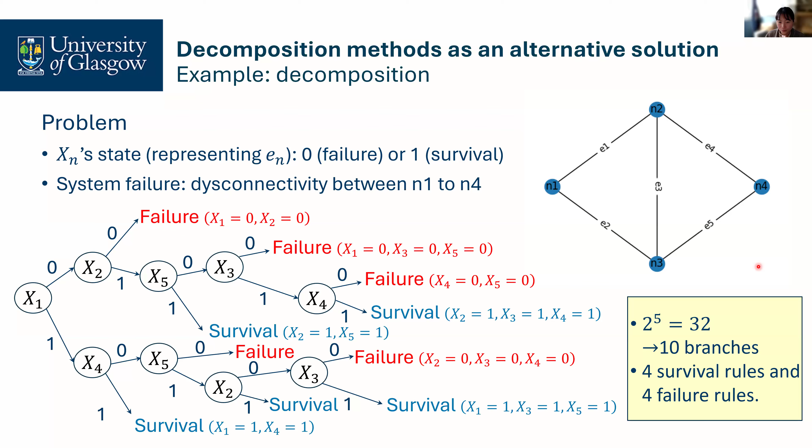Once we are done with the decomposition, calculating the system failure probability is easy, because we can simply sum up the probabilities of these failure branches. So if we have, for instance, component probabilities of 1% failure for X1 and X2, 5% for the 3rd and 4th components, and 10% for the 5th component...

For this first failure branch, x1 and x2 fail together, so we multiply their failure probabilities. For this branch, x1 fails, x2 survives, x5 fails, and x3 fails. In this way, we continue this arithmetic to decide the failure probability.

The simplicity of this arithmetic is the advantage of this computation method. It also has the advantage that there's no need for another branch and bound when the probabilities change. So if we have a different failure probability for X1, we can simply replace the number and repeat the same arithmetic.

When we compare the complexity, for MCS the complexity is inversely proportional to the system failure probability, while here it is proportional to the number of branches, which fairly rapidly increases with the number of rules. But these numbers of rules are quite well maintained even when the number of components increases, especially for a complex network or system.

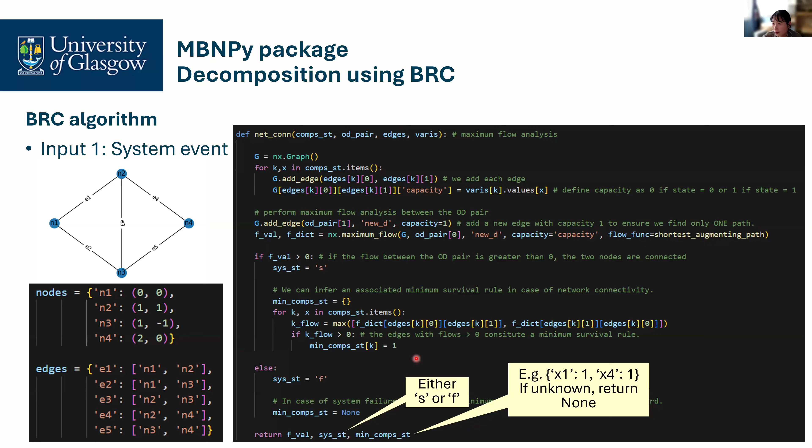If this flow is 0, this means the 2 nodes are disconnected, so we have system failure and we return system failure. In this case, if we can't decide the minimum component state that leads to this system failure, we can simply return none. But if you can identify the minimal conditions from this component state that leads to system failure, the algorithm becomes much more efficient.

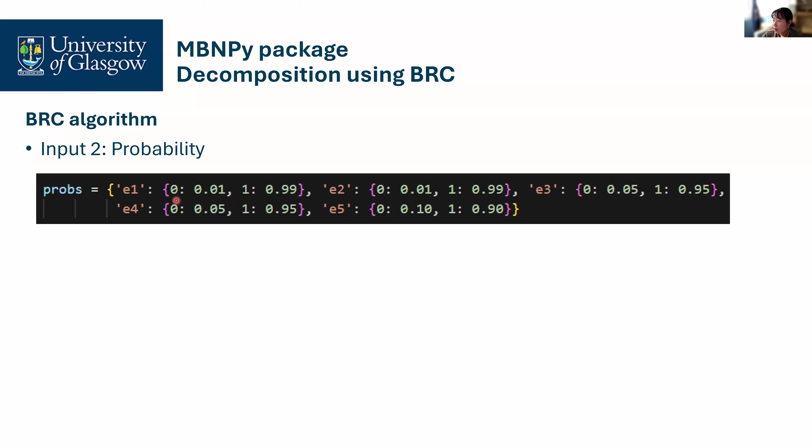The second input you need to provide is the component probabilities. For these, we can specify the probabilities for each of these states. Then we use this lambda function to generate the system function that accepts only the component state, while other variables are fixed. Then we put these probabilities and system function together to get the branches and rules.

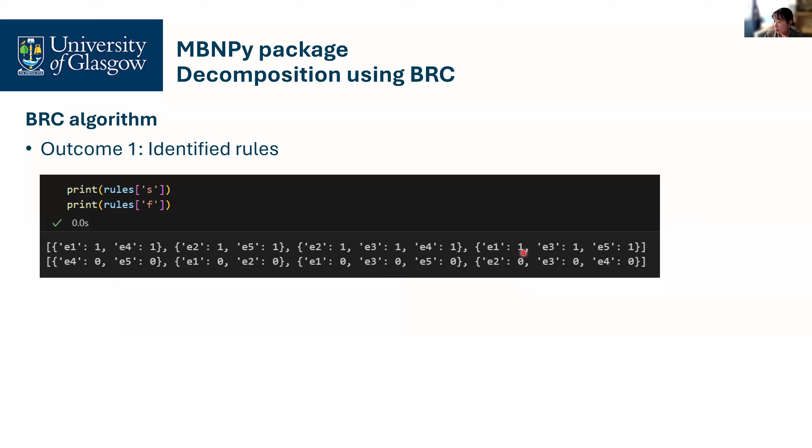This is how we can get the branches and the number of the 8 rules that we identified before, using this MBNpy package. If we check the rules, we can find that for the survival rules, it found all the minimum conditions for the system to survive, and the failure rules found all the rules that lead to system failure.

Once we are done with the branching, we need to use this Bayesian network. We can use the other functionalities of this matrix-based MBNpy package to make further inferences. This matrix-based Bayesian network is an alternative data structure for Bayesian network, which is a probabilistic graphical model useful for handling complex probabilistic models.

In a Bayesian network, the random variables are represented by circular nodes, and the directional dependence between random variables is represented by directed edges. It is useful that causal dependence is a subset of directional dependence, so we can use causal dependence to model the relationship between nodes.

There's only one constraint in Bayesian network: it should be a directed acyclic graph, because if there are directed cycles within the graph, it may create an infinite loop that never converges through inference.

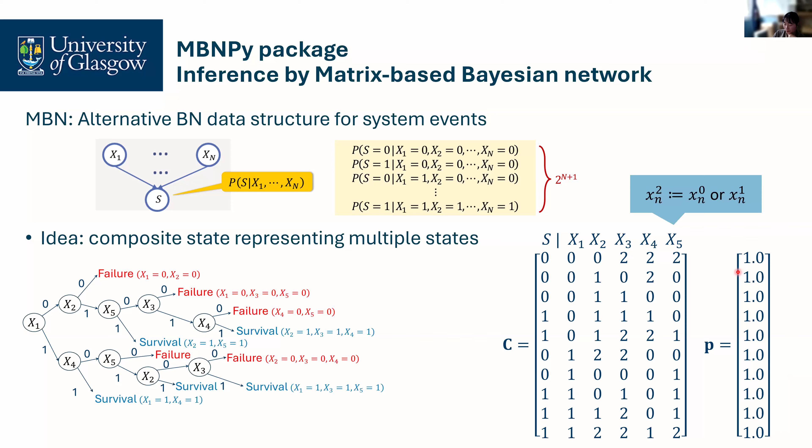So this is the probability distribution that we just defined for this S. And of course we need to define the probabilities of all these other components. So if you remember the previous setting, for x1 and x2, they can take the failure probability of 1% and the survival state of 99%. For x3 and x4, they have this probability of failure as 5%. And for x5, they have 10%.

So in matrix-based Bayesian network, we can define these event matrix and probability matrix. Then we can use this quantified matrix by using variable elimination inference, which is also a part of the function in the MBNpy package.

So in the GitHub that we shared with you before, there is a tutorial Jupyter notebook that features this tutorial, and this variable elimination is used to infer the marginal distribution of S.

So just to give you a brief idea of how this variable elimination works to infer a system definition, system failure probability. Within this Bayesian network, we need to eliminate all these 5 components, so that we can have only this S whose marginal distribution we are interested in. So if we are given this elimination order from X1 to X5, then in Bayesian network, what happens is we first product this first component, in which case in the graph we have this combined node, represented by this mathematical formulation.

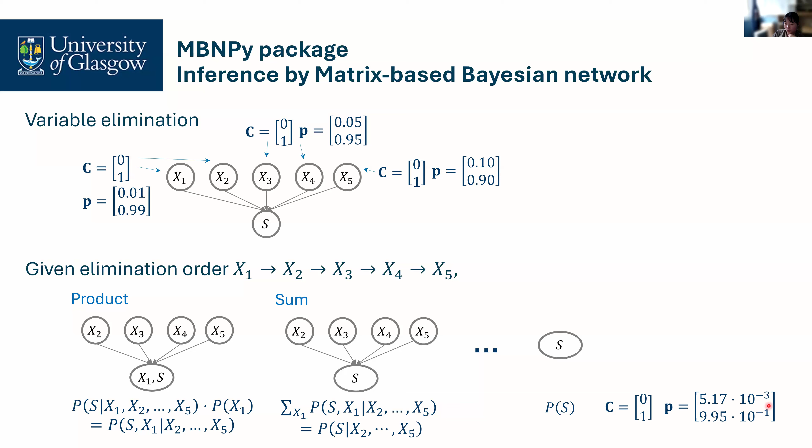And now we have this marginal distribution of the system event where the system failure probability is obtained as around 0.5%.

During the rest of this presentation, I will introduce how this can be applied to large-scale systems. Although what we'll be looking at during the tutorial sessions are more in a smaller scale, so that we can have a better idea of how the detailed mechanisms work. So we had to test this method to see if it works consistently for large-scale systems with different definitions.

And we performed approximate inference, which I didn't explain in this presentation, but we can terminate the branch and bound decomposition when the bound width is narrow enough. This is because an enormous number of branches might exist for a system event, but usually a handful of them have high enough probabilities to affect the system failure probability.

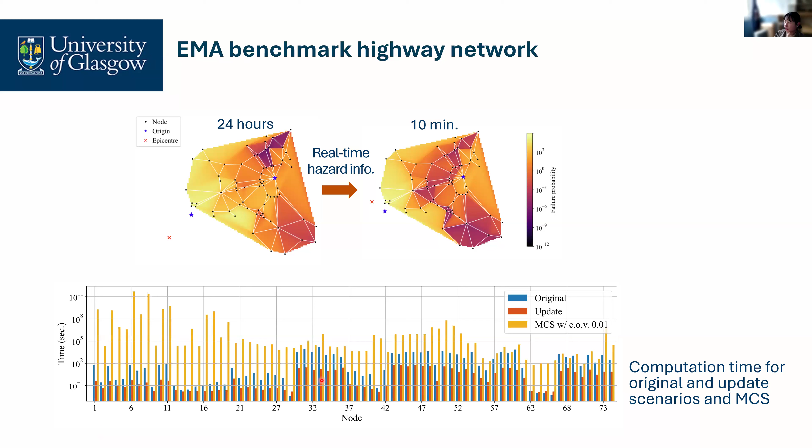So when we assume an updated epicenter location, we can update the system failure map, where now we can find the risk distribution becomes different. And it took only 10 minutes, and this red bar showed the time taken for this update scenario.

So in the long term, what we envision through this system risk assessment is these tools can be used in everyday practice of operation, because we all understand that systems level, systems thinking decisions are now our next step to make our decisions more efficient.

So in summary, this session was to introduce the challenge in system risk assessment, especially how we can address the challenge of exponential computational costs regarding the number of components. We particularly looked at this decomposition method and how we can apply it using the MBNpy package. And I wanted to show some large-scale benchmark applications so that you can have the idea of how this can be used for problems with varying scales.

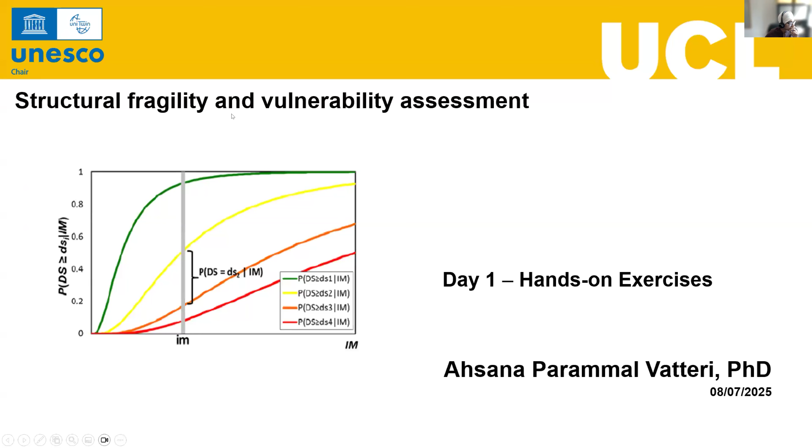Can you see it? I hope you're able to see the presentation. So, sorry. The first task is basically to apply the GLOSI taxonomy. We just very briefly discussed GLOSI and the 12 parameters that characterize the seismic performance of structures.

This building you have seen before in one of our examples. But how would you characterize this using a GLOSI taxonomy string? You are given some visual images. You can look at the attributes of all 12 parameters and classify them. You're also given some more information to help you with the seismic design level identification.

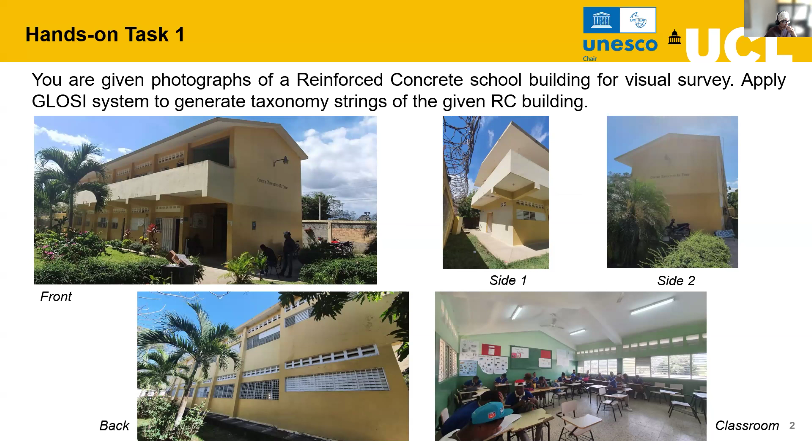As I mentioned during the presentation, it's not normally sufficient to only have a visual survey to identify the seismic design level. So please have a look at this and try to identify what attribute you would give for each of the 12 parameters, and then you can generate your GLOSI taxonomy string. The idea of creating this kind of string is that if the string or type is available on a fragility database, then you can directly use a fragility function that is available, rather than having to model and analyze your structure from scratch.

So this is your first task. The second task: we already saw one example of fragility derivation during the session today. Suppose you are providing a retrofit measure for that RC building — it's basically the same RC building. How would you then derive its fragility functions for the retrofitted case?

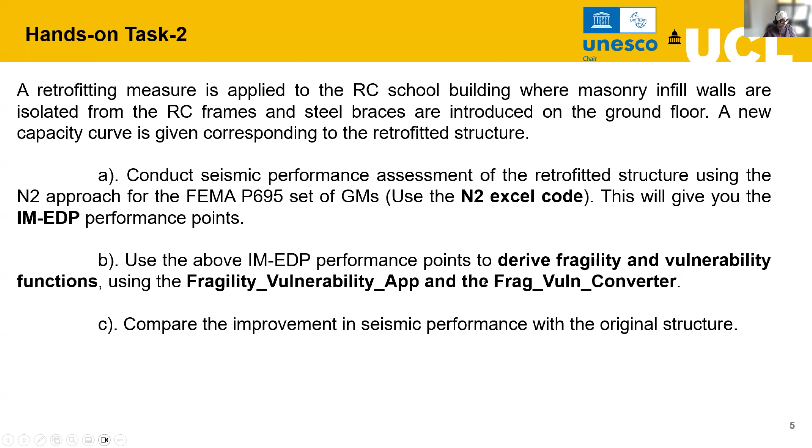For this, you're already given all the tools that we discussed today, the N2 Excel code and the MATLAB-based fragility vulnerability app. So you can have a go at installing these tools and running the analysis for this case. You're given the retrofitted structure, and as you can see, the GLOSI taxonomy string can be different from the original building, as the typology, seismic design level, and other features could be different.

And this is the new capacity curve, the pushover curve for this particular structure. You're also given the inputs for your fragility derivation — the EDP damage thresholds and the loss ratios for the vulnerability derivation. Please use these values. In the zip folder we already sent you, there is the input file for this capacity curve, which gives you the IM, or roof displacement, versus base shear coordinate.

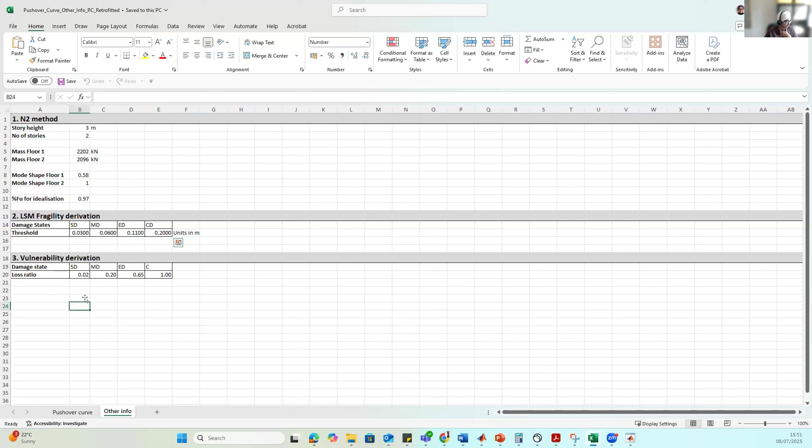So this is the input file that you're given. This is the pushover curve. Please note there is an update for the threshold values given - use the threshold values given in the presentation I just showed you. I'll be sending this file again after today's session, and we will send all the tools and the GitHub link immediately after today's session.